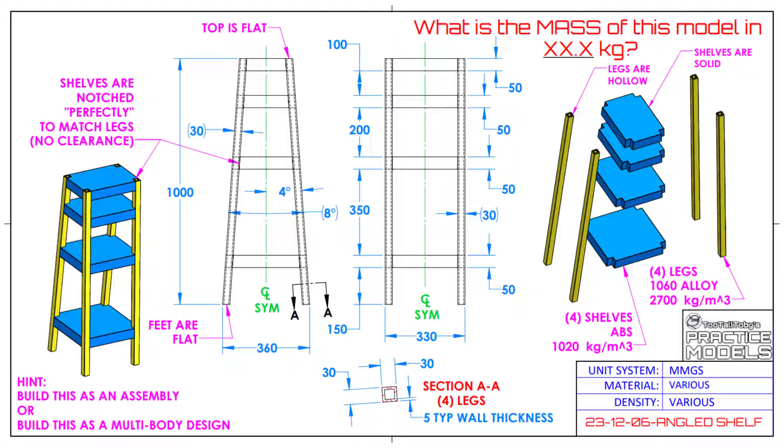So here we go. We're going to be doing this challenge now using SolidWorks, doing some live modeling. This is the challenge we're going to create, and unlike most of our live challenges, this one is an assembly. It's a shelf, 1 meter tall, with 4 shelves and a set of angled legs running up the side.

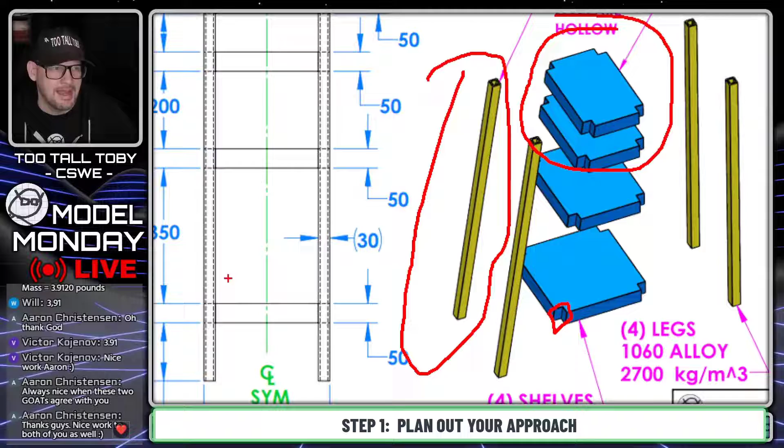What we always teach our students when doing 3D modeling is that before you get started, you want to come up with a game plan. Ask yourself how you're going to model each of the legs, how you're going to model the shelf, and how you're going to model the notch in the shelf so it perfectly matches up with those 4 legs.

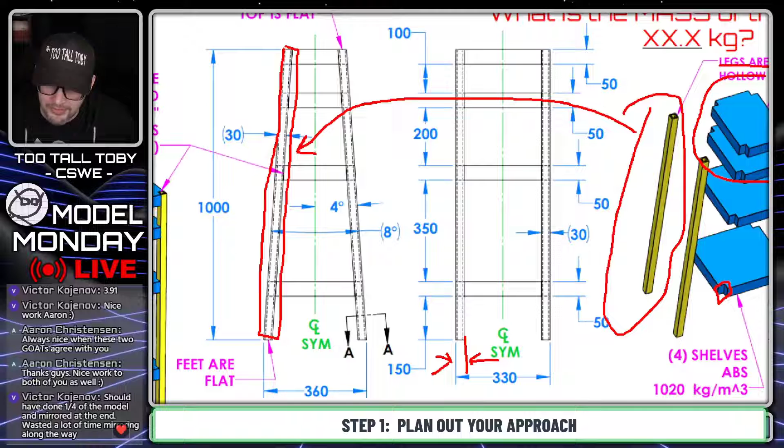I think for this model I'm going to use a single part file and do what's called multi-body design. This leg that I've circled, I'll create as my first body. I'll make a sketch on the front plane representing the shape of that leg, extrude it out to a depth of 30 millimeters, and use the offset sketch plane option to offset that sketch plane to 330 over 2, half of 330. That will give me my first leg.

Then I'll be able to do some mirroring with that leg. I'll mirror the leg over here, and mirror those 2 legs over here, and then I'll have all 4 of those legs.

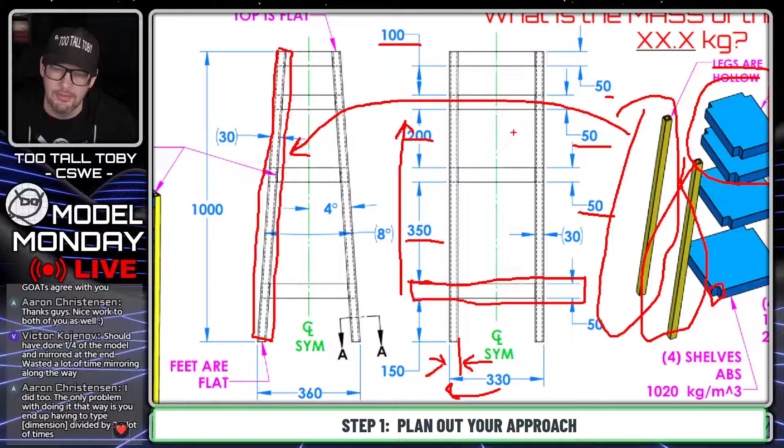Then I think what I'll do is create a sketch of the shelf by making a rectangle 50 millimeters high, and then do a really cool pattern called a linear pattern using the variable distance option. I'll say the first instance should be 350, the second instance 200, and the third instance 100. For each of them I'll need to add the 50 millimeter shelf thickness, and that should get me pretty close to the end of the model.

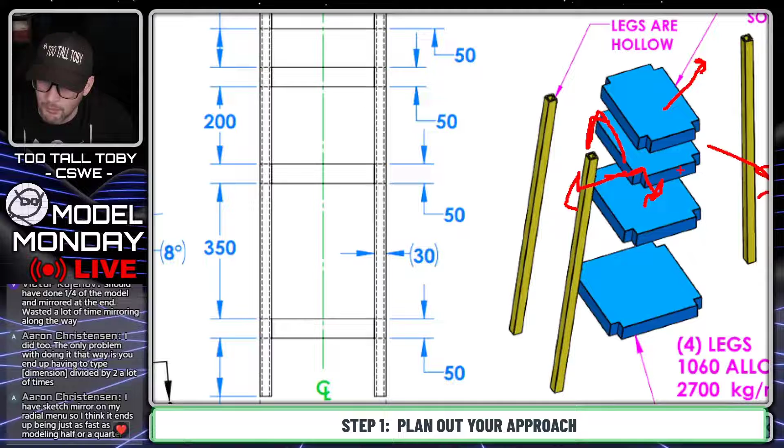Then I'll come up with the challenge of how to notch out these corners here. I think what I'll use for that is actually a little bit of surfacing to mix it up. I'll make a small surface on that leg, extend that surface, and then use it to do a cut through those shelves. Maybe I'll make a mirror of that surface too so I can get all 4 corners at once and make a cut of the shelf in the corner.

There are lots of different ways you can do this. I know in the chat Aaron was saying he did it using an indent command in the corners. You could maybe make it as an assembly. Lots of different ways to do this, but the main thing you want to take away is to always come up with a game plan before you get started with your model.

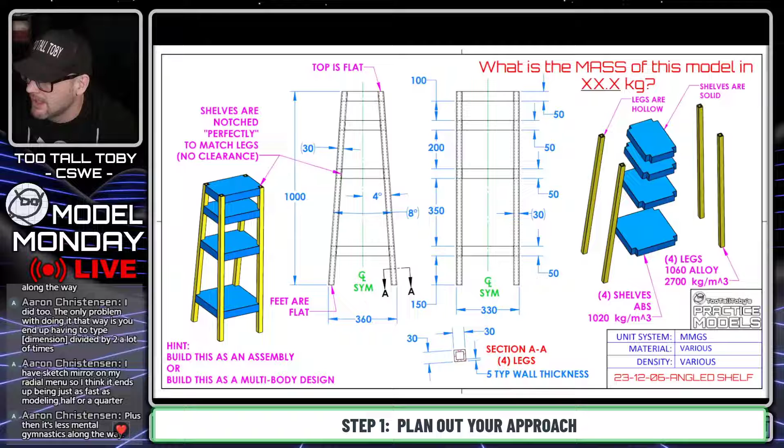So now that I've got that game plan, let's go into the Windows snipping tool. I'm going to grab a screen capture of this model and move it over onto my second monitor, and begin modeling this. As you guys know, when I start modeling I get really zoned in, so I'm probably not going to react to the chat too much.

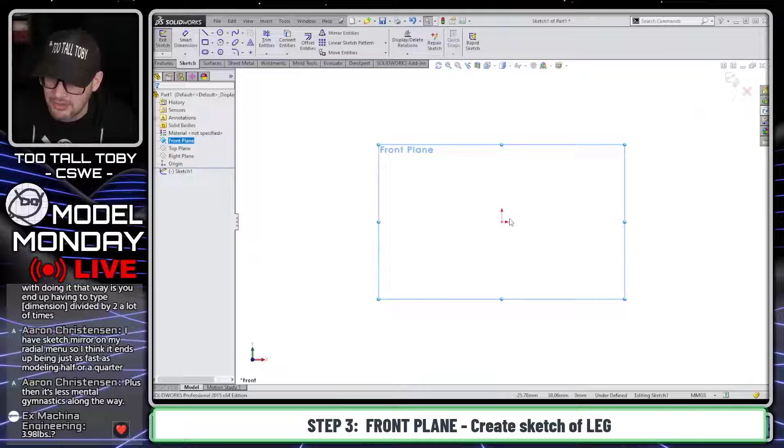I'll say that center line is going to be used to drive the location of this set of angled lines. Now, one thing you can do when sketching in SolidWorks, if for some reason you don't pick up on the parallel relationship, you can see the relationship showing up as parallel, in yellow, meaning it will add the relationship of parallel there.

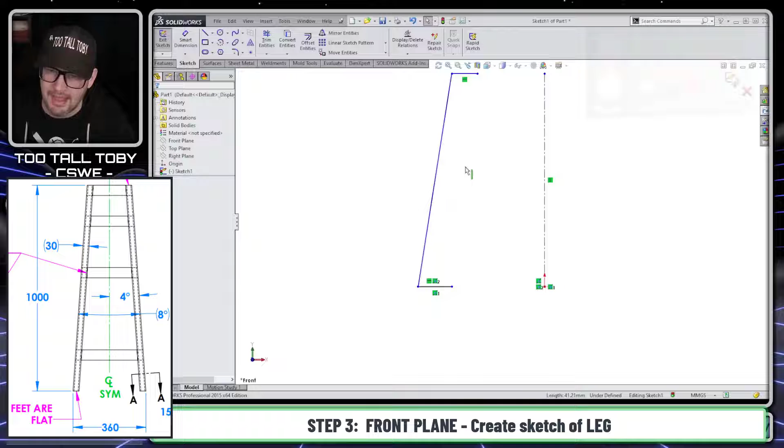I'm going to delete that line, and recreate a line here. So here's the line. And if for some reason you ever don't get that relationship to show up, you can just hold your mouse over that other line for a moment, then move back over, and that'll reactivate the relationship to that line. So if you ever find yourself in that spot, that's a pro tip you can use to make sure you reactivate that automatic relationship capability.

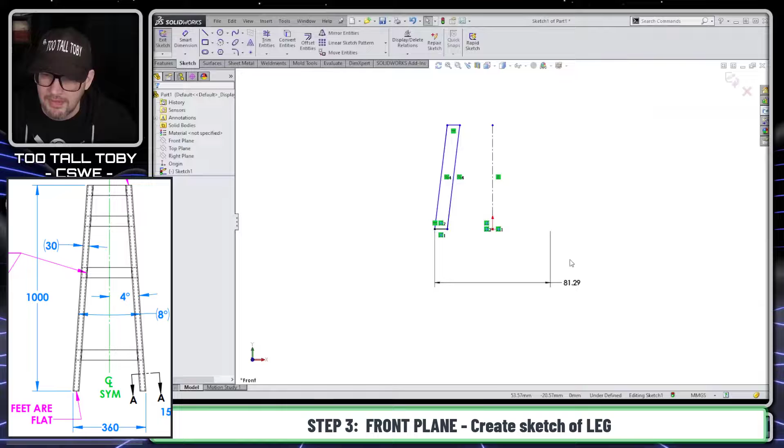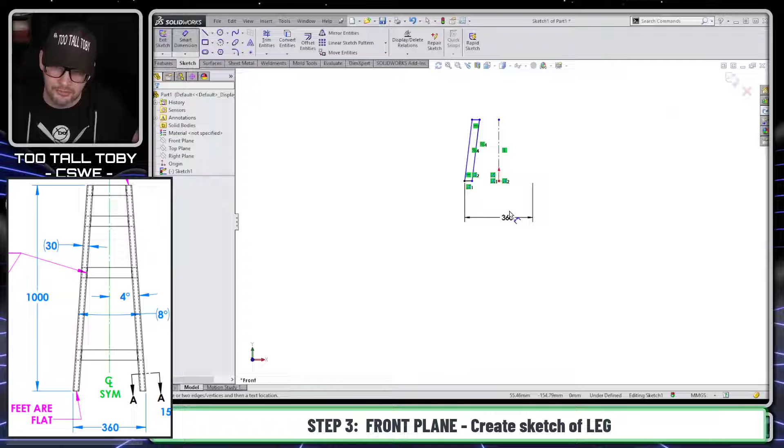Now this is going to have a distance to the outside of 360. The way I'm doing that is using what's called a doubled dimension in SolidWorks. I pick this point, pick this line, come across, and make that 360. Then SolidWorks does what's called auto scaling. A moment ago, before I did that, the dimension was 81, and it almost looks like the screen doesn't change at all when I change that to 360. But that's because when you put in your very first dimension, SolidWorks automatically upscales the entire sketch to match the value of that first dimension. So auto scaling on that first dimension - very cool functionality in SolidWorks 2015.

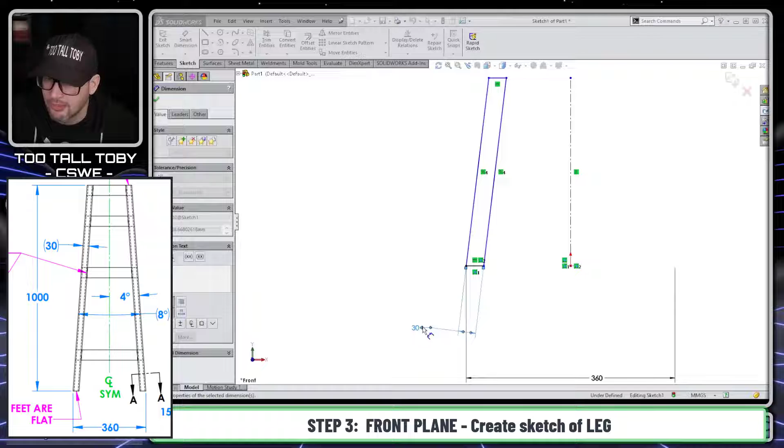Now what I'm going to do after this is create another dimension here, which represents the width of this thing - it's on an angle here. That width is going to be 30 millimeters. Then there's a dimension here representing the height of this thing, so the height is going to be 1 meter. Finally, I'm going to indicate an angle dimension here, from this line crossing over that line, supposed to be 8 degrees.

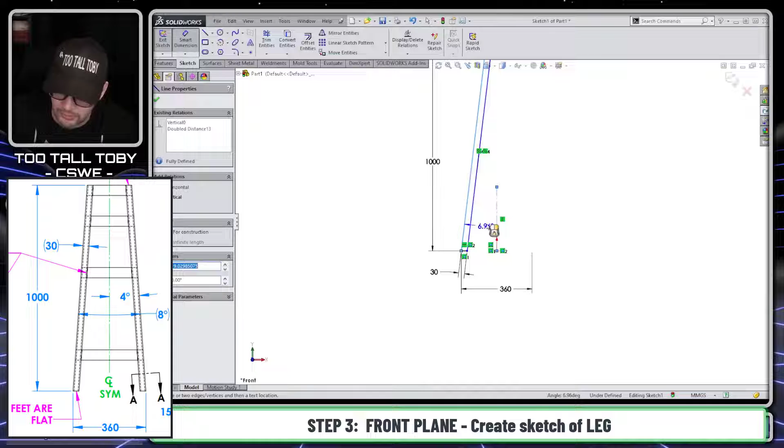So the way we get those double dimensions when doing an angle is you hold shift. When it's a linear dimension, it happens automatically, but when it's an angle dimension, you have to hold shift. So we're going to hold shift there and make that a dimension of 8 degrees. And there we go - that sketch is all black, meaning it's fully defined, fully constrained.

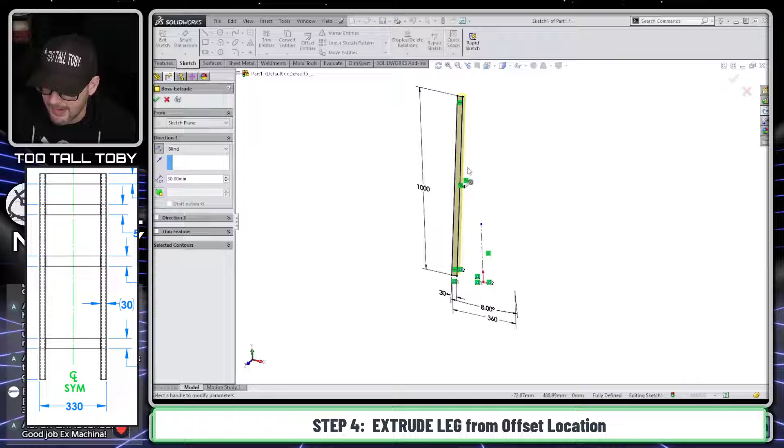Now we're ready to go into an extrude command. This thing is going to have a depth of 30 millimeters, but it's not going to be 30 millimeters from the front plane - it's going to be 30 millimeters offset. So I'll use this flyout menu here to make this offset, and that offset distance is going to be 330 over 2.

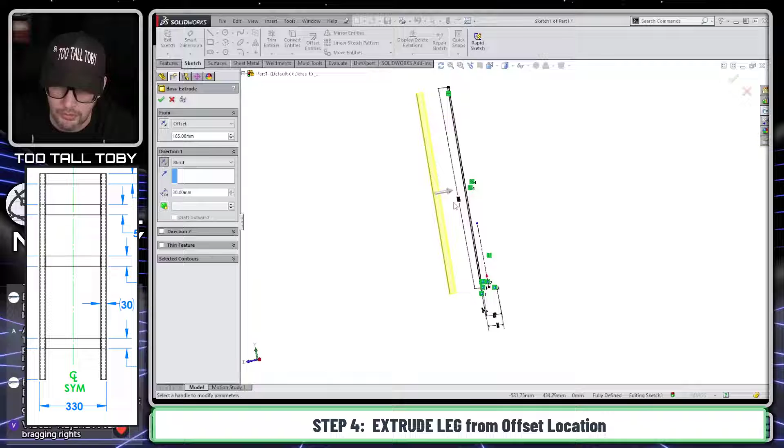330 over 2. And then we can examine the extrusion direction here, flip the direction if we need to, because it's going to be 330 over 2 and then going inward, or this way, inward - it's going to be going inward. So make sure the direction of that extrusion is correct. And there we go, now we've got that leg extruded in the correct direction.

Now this leg is supposed to be hollow, so I think the next thing I'll do is drive a shell here that's going to have a 5 millimeter wall thickness, and that shell is going to be applied on this leg and on this leg here. So we hit the green check mark, and there we go.

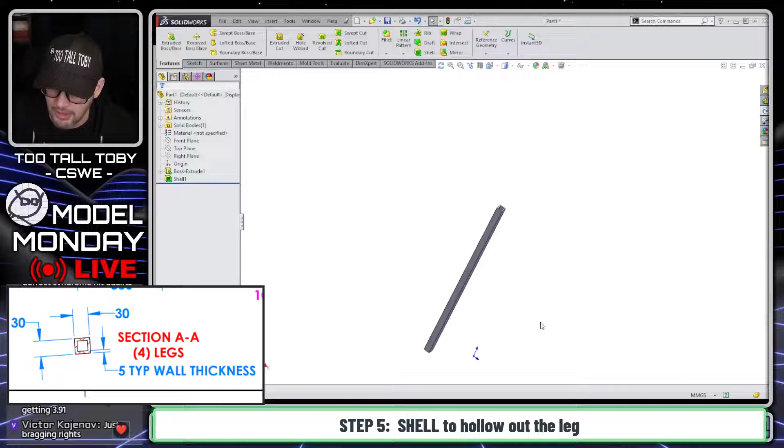That gives us our first feature there in the tree, that leg. Now I'm just going to show the front and the right plane here so you can see what our plan is.

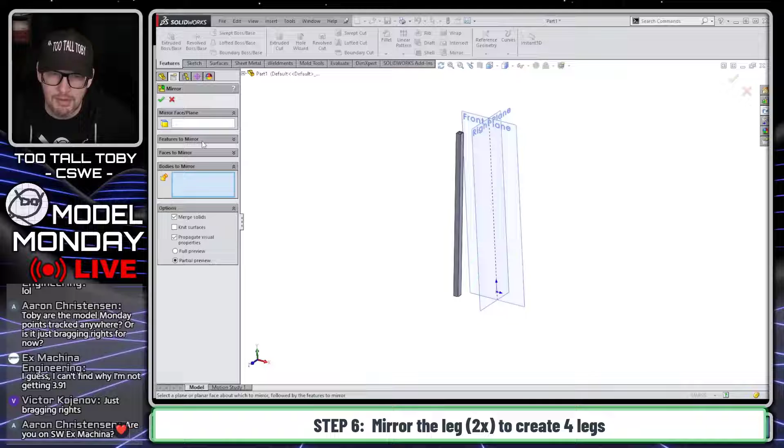Our plan next is to mirror that leg about both of these planes. We're not going to do this as a mirror feature where you go in and choose a feature to mirror. We're going to go down here to bodies to mirror. Right now the selection box is on features to mirror.

Here's a pretty cool thing that I learned. Believe it or not, I learned this from Aaron C in the chat, just through osmosis, through a different conversation we were having about a custom macro he was working on.

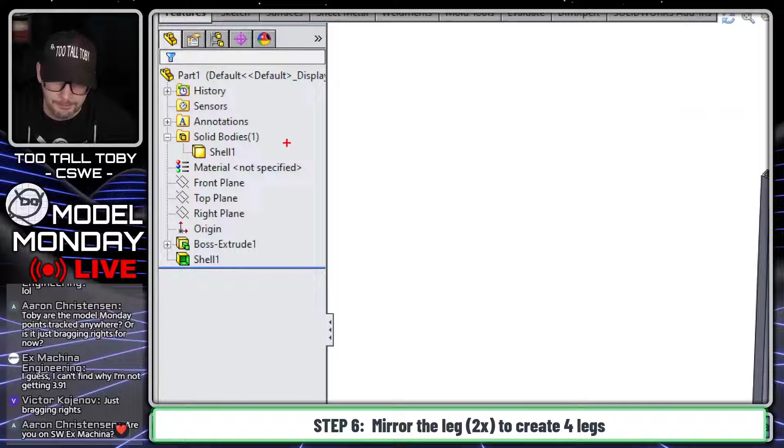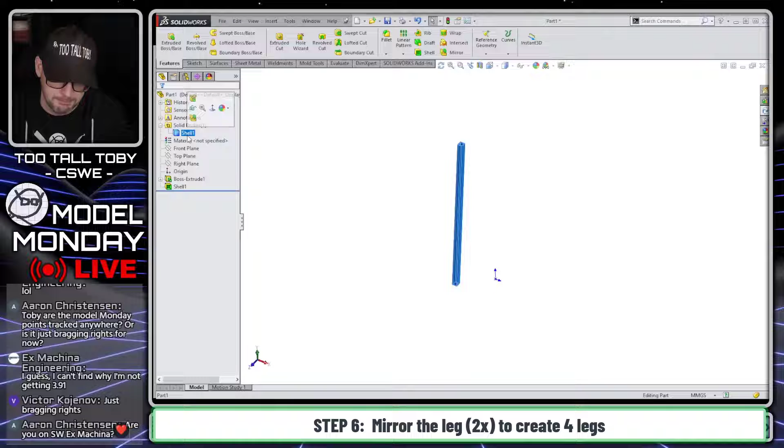Check this out. If you go into the solid bodies folder in SolidWorks and pre-select a body, then pre-select a plane, when you go to the mirror command, SolidWorks will automatically use the bodies to mirror field. Normally you can choose features, faces, or bodies to mirror. But if you pick this body, hold control, pick a plane, let go of control, and then choose mirror, SolidWorks automatically does bodies to mirror.

If you take that one step further and use the power move I posted a couple weeks ago, where you modify the context menu so that mirror is right here, then you can pick the body, hold control, pick the plane, let go of control, mirror, and just hit the green check mark, and you'll have your mirrored body.

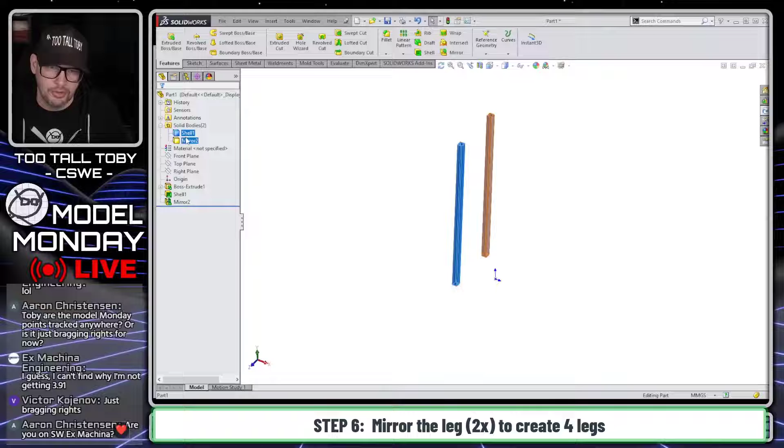So we can do it again here. We hold control, pick these two bodies, pick the right plane, let go of control, mirror, and hit the green check mark, and boom, we're done with those mirrors. It's all really out of the box functionality.

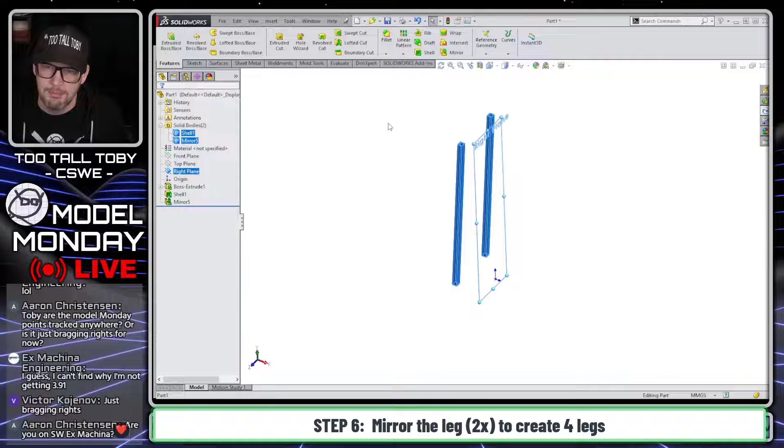The only thing I really did to customize it was modify this toolbar. But even without it, you could just click mirror and right mouse button to finish. It keeps going to merge solids on the first one because it's not multi-body yet, but once it's multi-body it'll happen automatically. So we pick these two, pick mirror, come out here and right click. Boom, we're done mirroring those bodies.

So that's something new I discovered and have been using a lot lately: pre-selecting a body from the tree and then choosing mirror. That automates the process of selecting the bodies to mirror. A nice little extra pro move in this example.

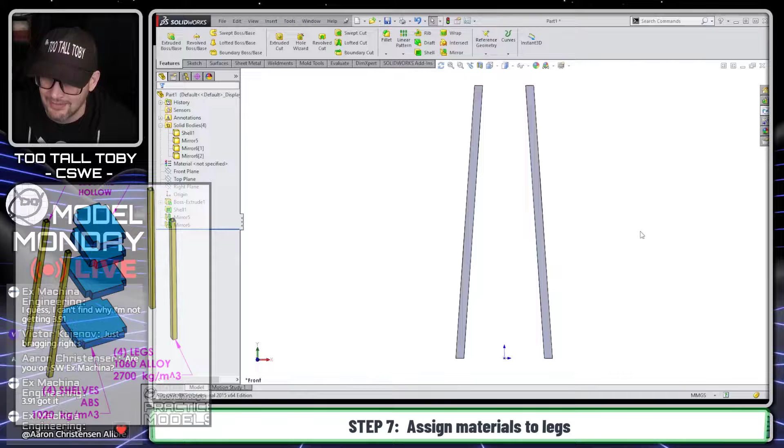All right, all of these legs are made from the same material, 1060 alloy. So I'm just going to make the whole part out of 1060 alloy. Here we go, 1060 alloy for that whole part. Then I'll make the shelves out of a different material.

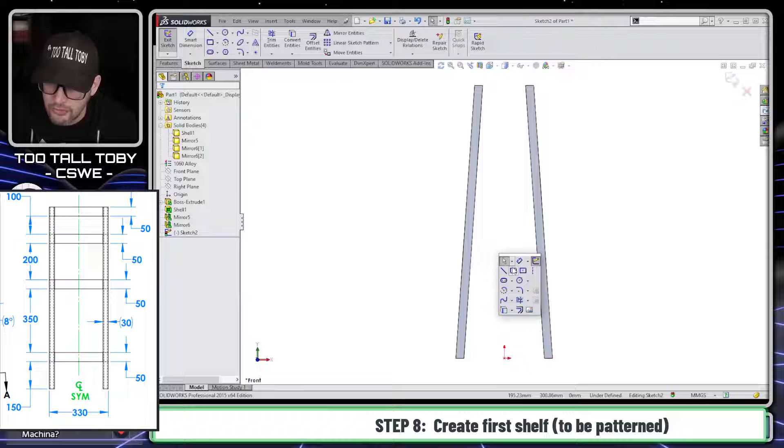Now for the shelves, I'm going to go to the front plane, begin a sketch, orient my view. The way I originally did this was I created the shelves individually using rectangles, like this. I made this 50, enter, let's say 300, something enough that it'll stick off the ends here. Let's make it 500.

Then I included a vertical point here, so I could take this point and make it vertical. Then I took that geometry, window-selected, held control, drag and drop, repeat, drag and drop, repeat, drag and drop, making all these points vertical, and then added the dimensions between them. The nice thing about that is it makes it easy to align the top shelf to this top segment.

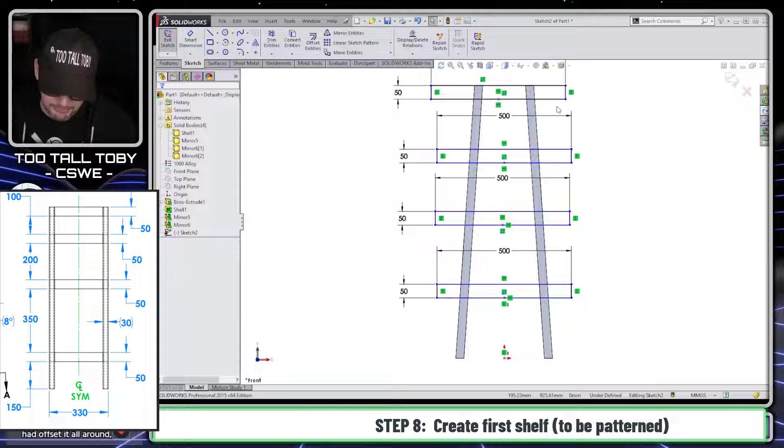But I'm going to show you today a different way of doing this. That's totally valid, you could do it that way and then use the remaining steps I'm about to show you. But a different way is you could create the dimension for the first shelf here from the bottom.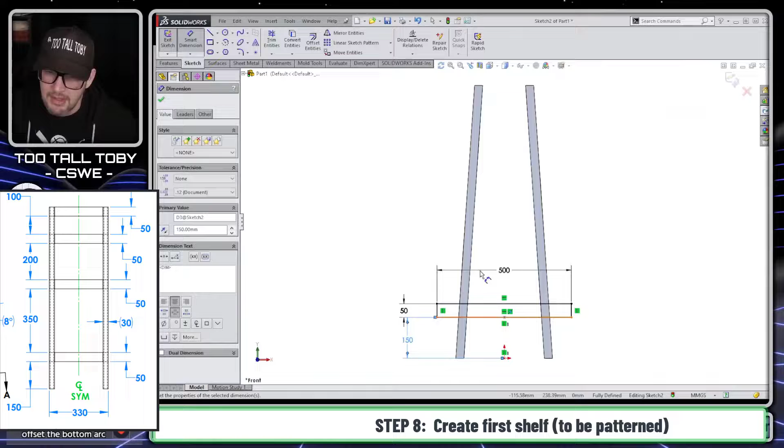So this is going to have a dimension here of 150. We'll go from the origin there to that first shelf, and we'll make that 150. And then we can take that geometry and extrude it. We're going to extrude that, and let's make it up to face for both direction one and direction two. I'll double click this face here, so there it goes, up to face.

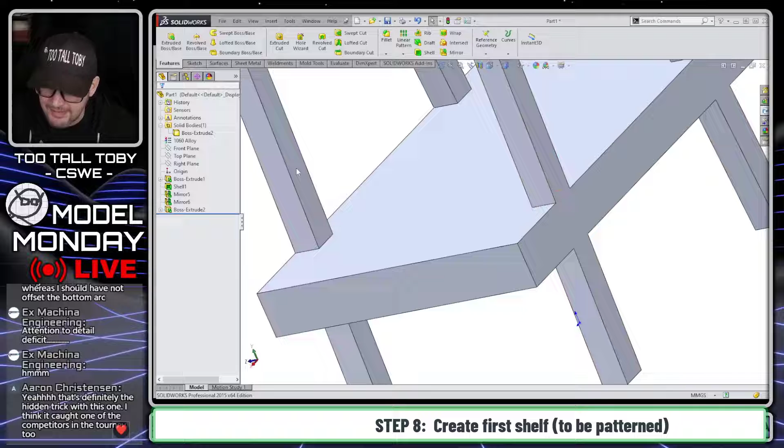And currently that is merged. That's not what we want. So I'm going to edit this feature here and say don't merge the results.

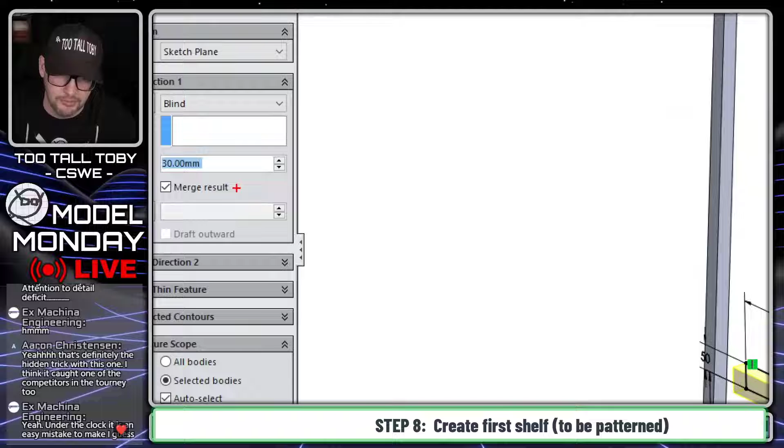Here's another kind of cool trick you can do if you're ever working in SolidWorks with multi-body. You can see here that when I'm in the sketch and I go to extrude it out, the default behavior is that merge results is selected. When you're doing multi-body or even a single body, it always defaults to merge result.

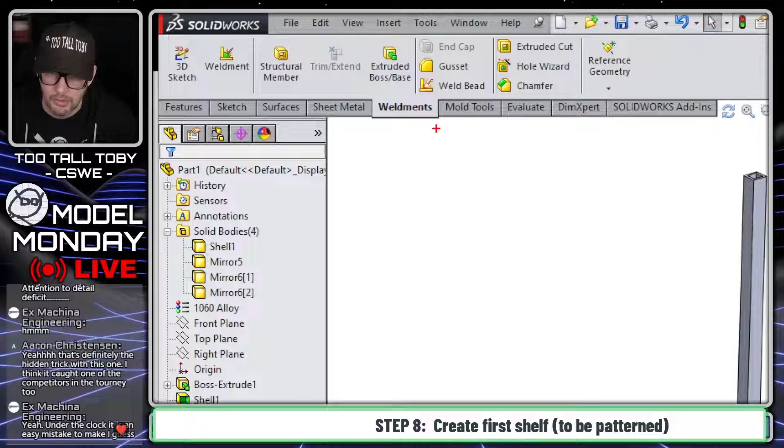Well, the quick way to get that to not be selected is you can go up here into weldments and click this button that says weldment. Let me get out of the sketch. Now I'm going to go up here and click this button that says weldment. I'm on the weldments toolbar here. And that's it, I'm just going to click the button. It adds a new feature in the tree.

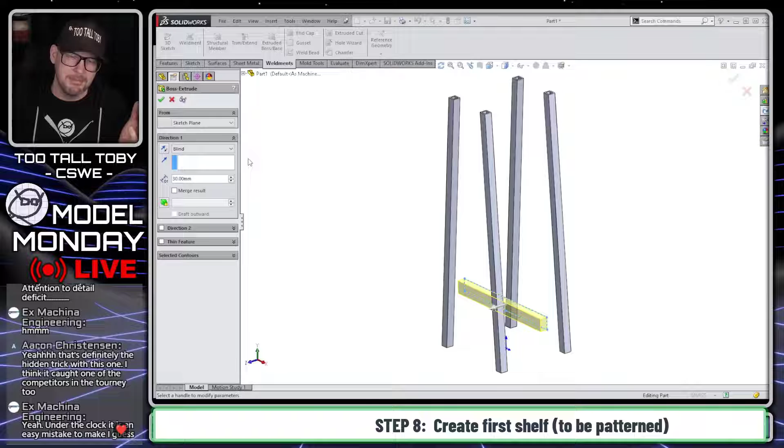It changes this to be a cut list, which means it'll group together items that are identical. But what it also does is now when I go to this sketch and extrude it, merge result is not selected by default. So if you know you're working in a model that's multi-body, it doesn't have to be a weldment. It could be a plastic enclosure for a remote control with a bunch of buttons, designed all in one part using multi-body. If you just click the weldments command and add that weldment feature at the top of the tree, merge results will no longer be selected by default, and that can be a nice time saver.

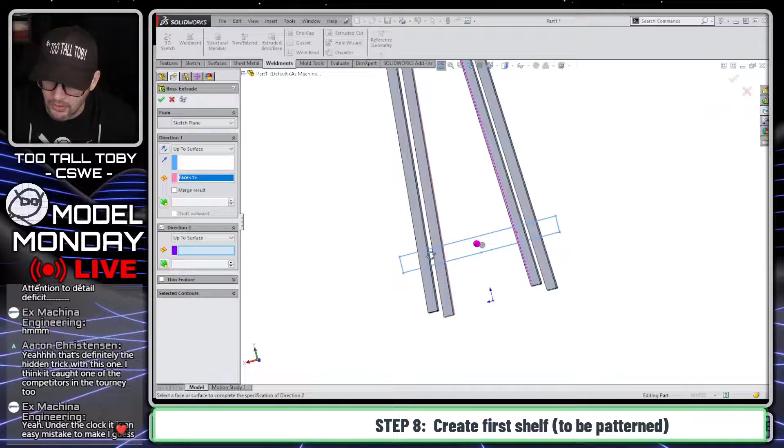So now we'll go extrude. We'll double click on this face here so that we go up to that face. For direction 2, we choose up to face, and we click on this face back here for direction 2. And there we go. We hit the check mark, and now that is not a merged result.

And this shelf is going to be made out of a different material, ABS. So I'm going to go to that shelf, right mouse button on the body, choose material, and change that to ABS.

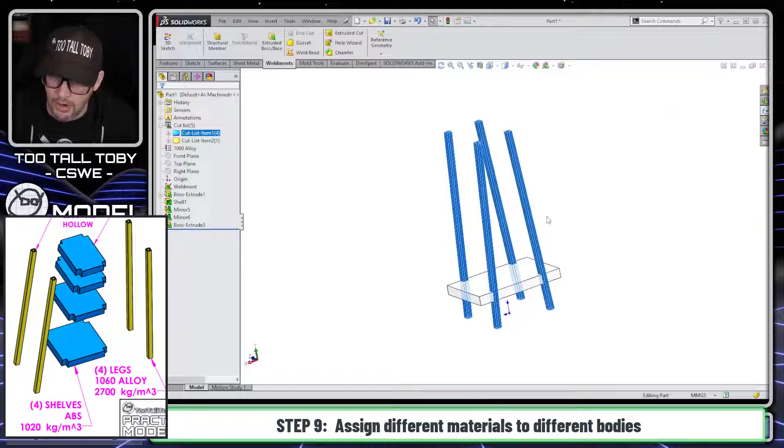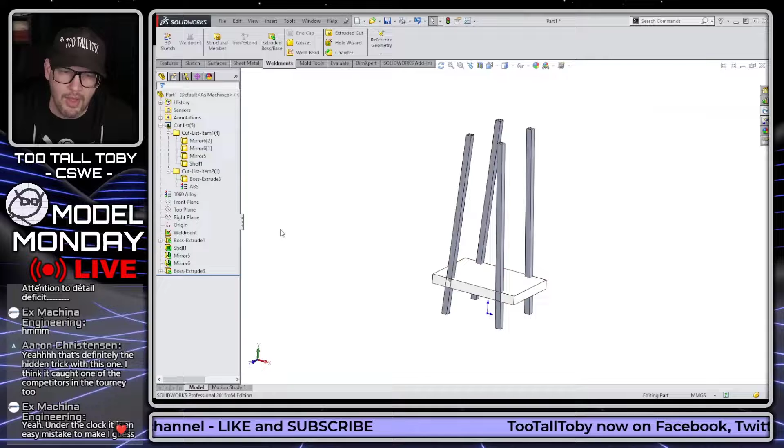So now the way these are listed is a little bit different. These 4 are identical bodies, all 4 of them are identical, so it's one item, one drawing, one SKU with a quantity of 4. And then this one has a different SKU, and this one also has its own material, so the material is listed down below. These bodies here are all using the material of the part. This body here is using a different material, it's using this ABS.

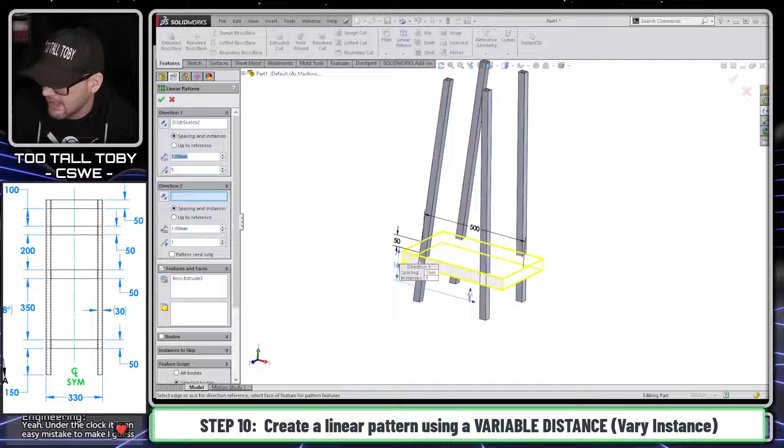So now I'm going to take that body and choose to create a linear pattern from that feature. I go linear pattern here, and I'm going to say that the linear pattern will use this dimension to drive the direction of the pattern. This is just something kind of cool you can do with linear patterns, using a dimension to drive the direction. Then for the spacing, I'm going to say that spacing is going to be 350. There's the spacing of that pattern, and there's 4 instances of that pattern.

That looks okay, certainly the first one looks good, but the remaining shelf is supposed to be 200, and the final shelf is supposed to be 100 for the spacing. So what I'm going to do is go down to the very bottom of the linear pattern command, where there's an option for instances to vary.

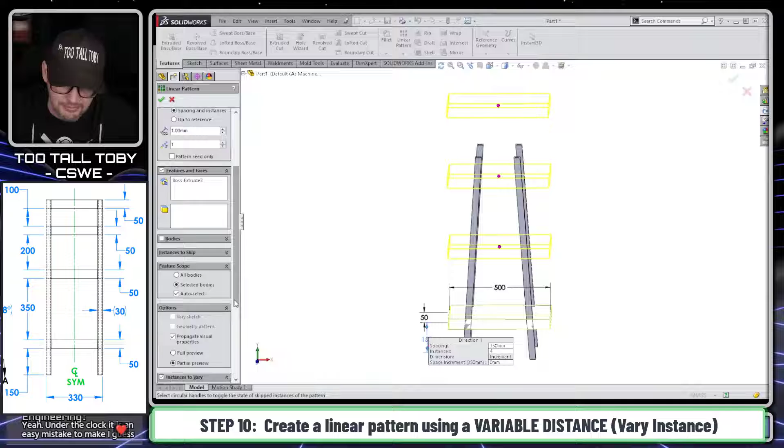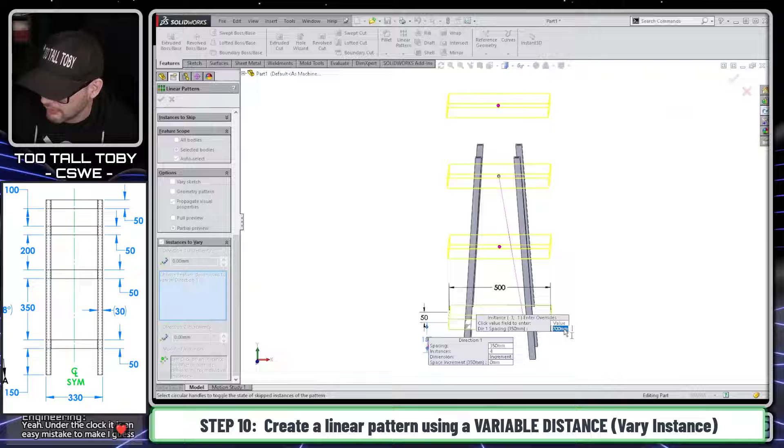And I can choose that option for instances to vary. And then what I can do here is for each of these instances, I can click on this little magenta dot and I can say modify instance. So this one is going to have a spacing of not 350, but really it tells you what the total calculation is. So it's like 350 plus 350 gets you to 700. So it's going to be 350 plus 200 to get me to that instance.

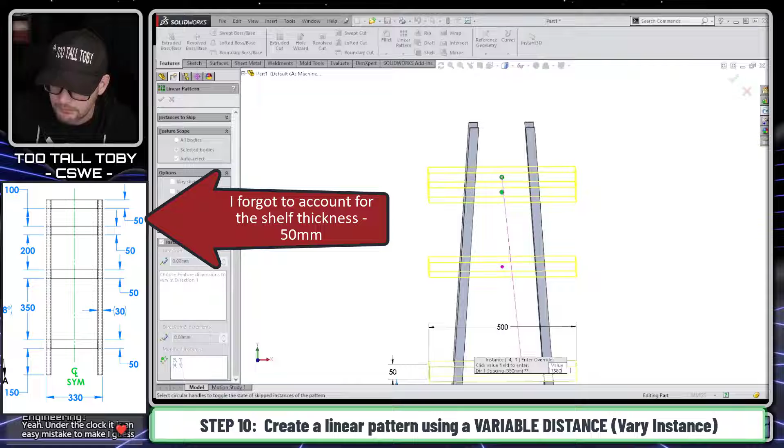And then I'm going to do the same thing here. I'll say modify instance, and this one is going to be 350 plus 200 plus 100. I think, yeah, you know what? I needed to add that extra 50 in there. So we'll modify this instance and make that plus 50, or 600. And then we'll modify this instance. And this one is going to be plus 100. So this is going to be 750. 750.

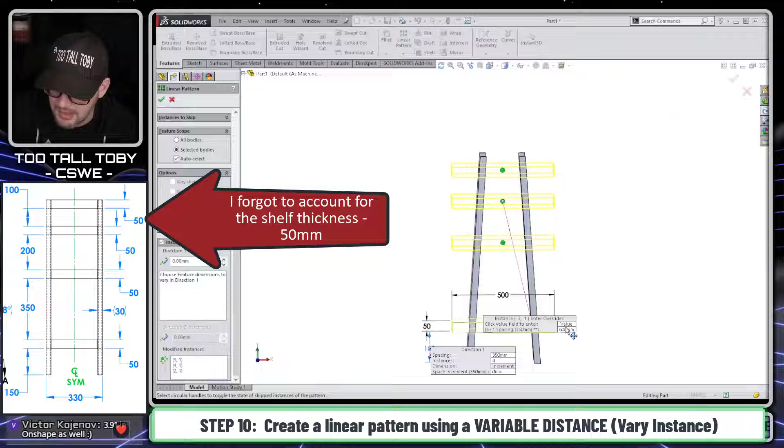Oh, I guess actually this first distance here was wrong also, right? Because it's 350 plus 50. So, all right, it's fine. So this is going to be plus 50 as well. So 350 plus 50, so 400. This one is going to be 650. And then this one is going to be, I'm just adding the 50 here, make that one 800. Whoops, 800. There we go. So that gives us the spacing using a different technique.

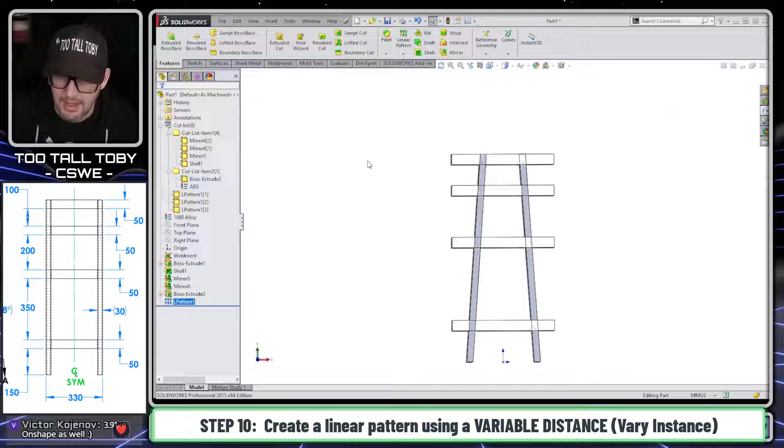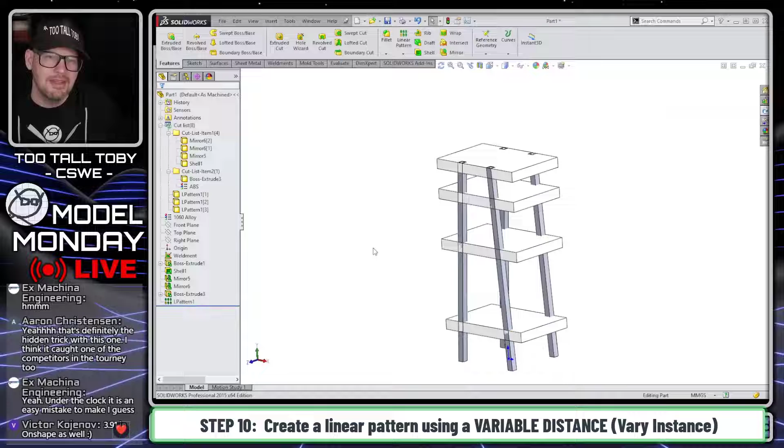When we do the linear pattern using the modified spacing option, we can get that same spacing. This seems to me like it's a little bit cumbersome. You saw as I was going through, I was doing some extra steps that I probably would not have done in the actual live model. I think I would have just used the technique I showed you initially, but this is meant to be kind of a tutorial, a live solve, and I wanted to just show you some other functionality.

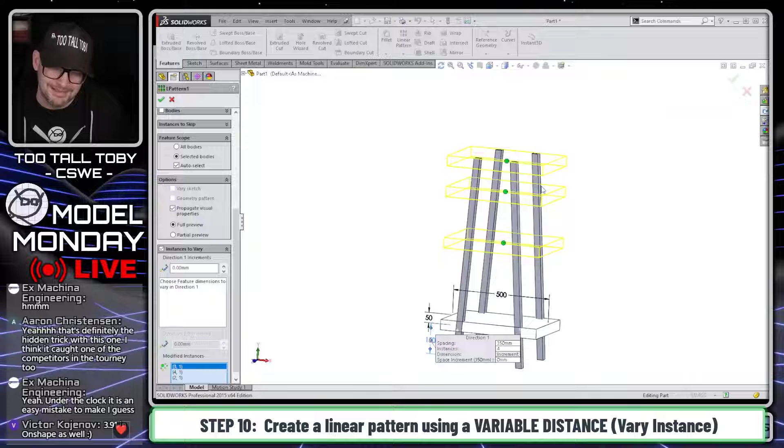To date, when we've talked about this option of modify instances, what we've really talked about is modifying the width of those shelves at the higher level, modifying a dimension from the sketch, but you can also modify these instances and change the spacing of the linear pattern in those modified instances. And that's really what I wanted to show off in today's demonstration.

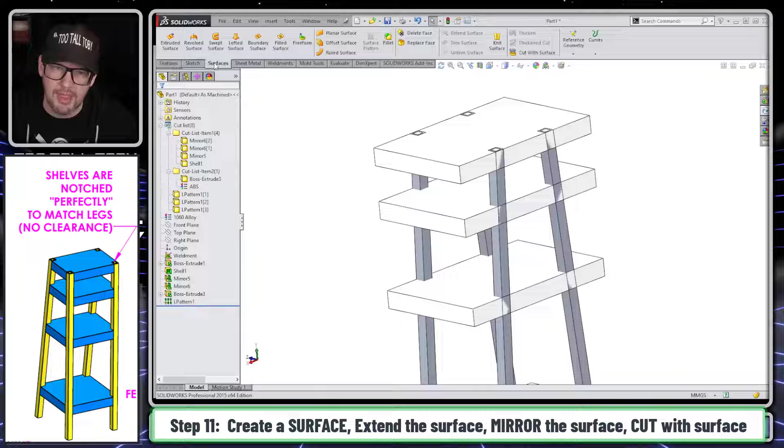So now we get to the final phase of this design. And for me, what I'm going to do here is use a surface command to create the geometry that I can use to cut these shelves. That surface command is something that I'm very comfortable using. If you're not using surfacing a lot, then this might be a little bit too exotic for you. But the way that I would do it is I would go surfaces and say offset surface, and I'm going to offset this surface at 0.

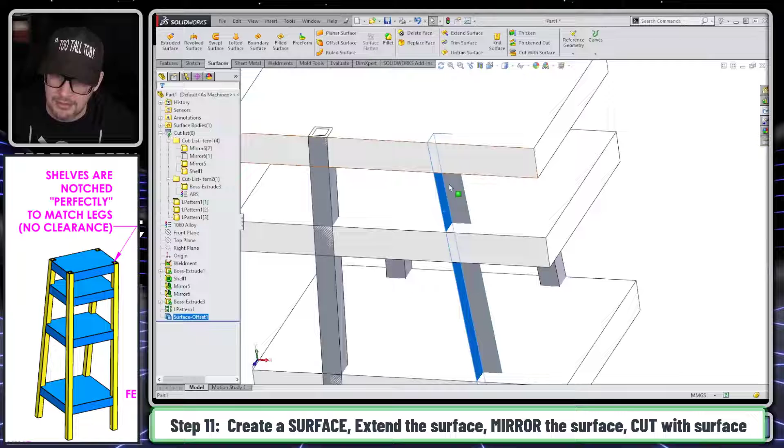And what I'm going to offset is this face here on the back of that leg and this face here on the inside of that leg. And once I offset those two faces, I can hit the green check mark here. I'm going to hide that body. What I'm left with here is a surface here and a surface here that I can use to cut. The problem is that this surface here isn't long enough to do that cut.

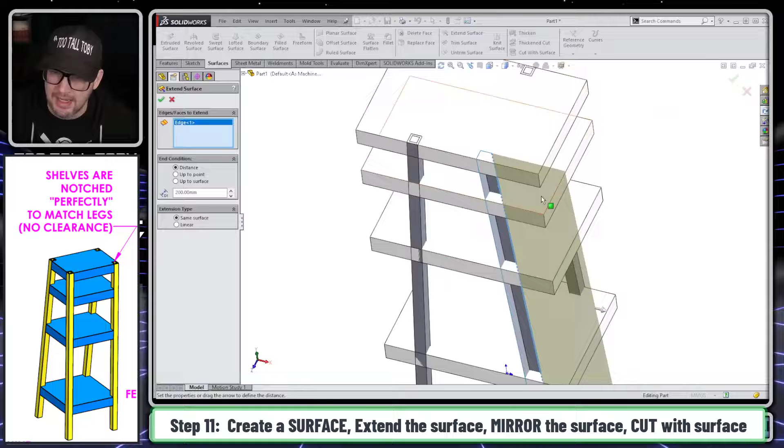So I need to do what's called a surface extend. So I would do an extend surface here and maybe bring this out, say 100, 150 millimeters, whatever I need to get that surface out far enough, maybe even 200 millimeters. And now that I've got that surface extended out, I've got enough room on that surface to cut these shelves.

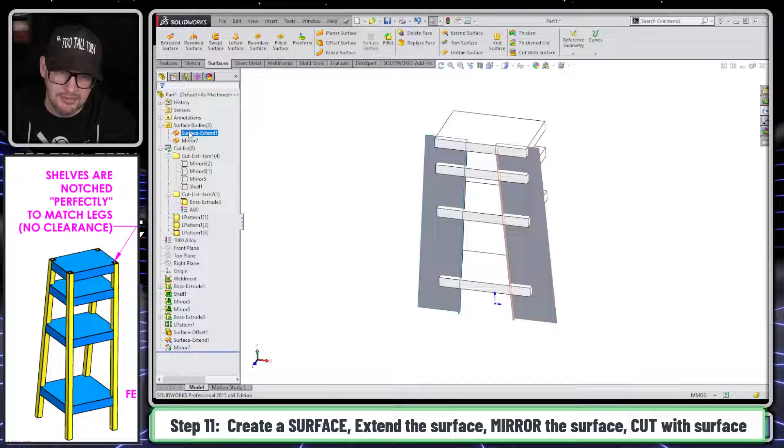So what I would do here is I would probably hide these remaining legs just to make it a little easier to see. I would use the trick that we talked about earlier: pick the body from the tree, hold control, pick the plane, let go of control, mirror, right mouse button to finish that, and then pick the two surface bodies, pick the front plane here, let go of control, mirror, and then right mouse button to finish that.

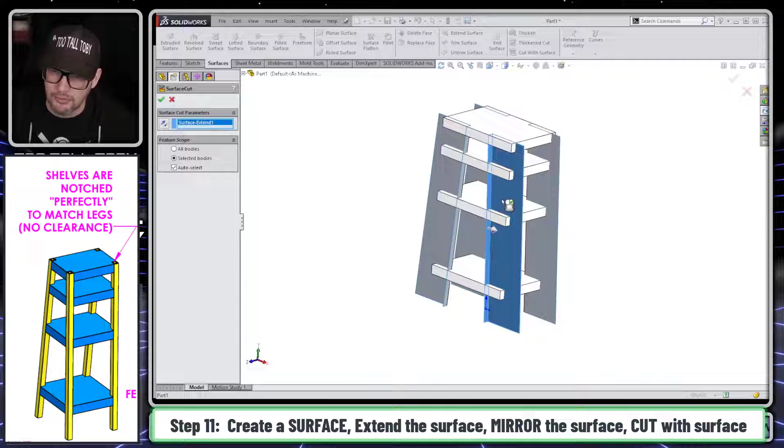And now I can jump into the command cut with surface. So insert, cut with surface, or here, cut with surface. Then you pick your surface that you're going to be cutting with, and then you pick the body or bodies that you're going to be cutting through. So I'm going to be cutting through these bodies here. And now I've removed that corner, and then I can just repeat.

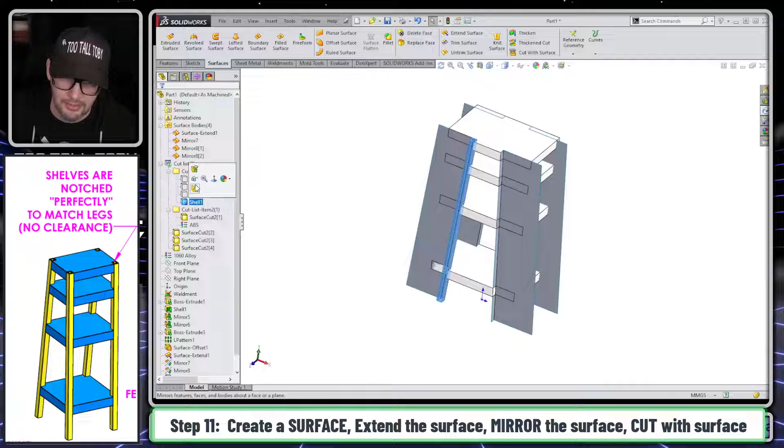So cut with surface. I'm going to pick this surface here. Usually if you do auto select, it's actually based on hide show visibility. So if I hit the green check mark here, it'll probably only cut these and not cut the leg that was there. So that leg is probably still there. Yep, I can see it's still there in the preview. So it's usually just based on hide show. If it's shown and it's interfering with that surface, then that body will be selected.

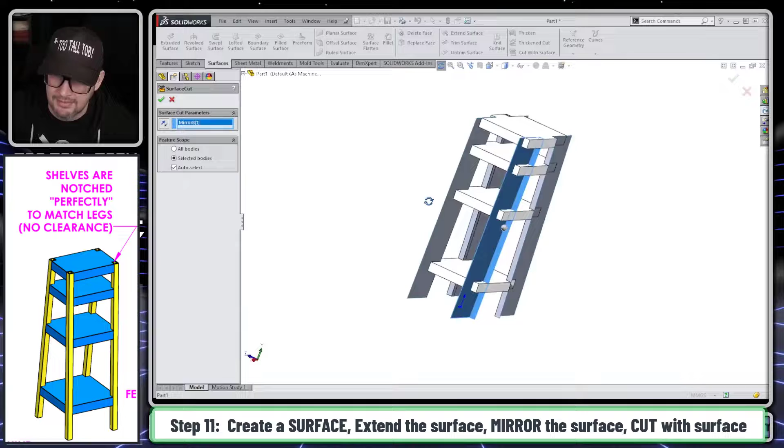So instead of needing to pick these 1, 2, 3, 4 bodies, what I could do is I could say cut with surface, and then I could say auto select. And since these 4 bodies here are shown, and since they're being intersected by that surface, they're just automatically selected.

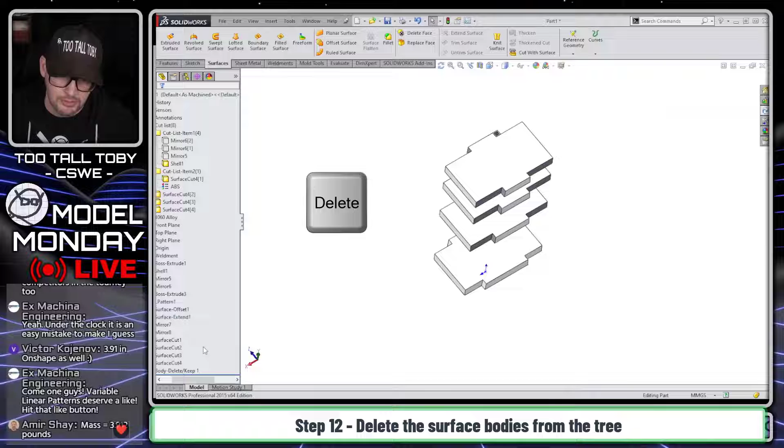Now, the final thing I'm going to do here is pick all these surface bodies and use the command insert features, delete/keep body. But the shortcut to that is if you pick a body from the body folder and you press delete, then those bodies are selected and a new feature is created down here at the bottom of the tree called body delete/keep. So now those bodies are gone.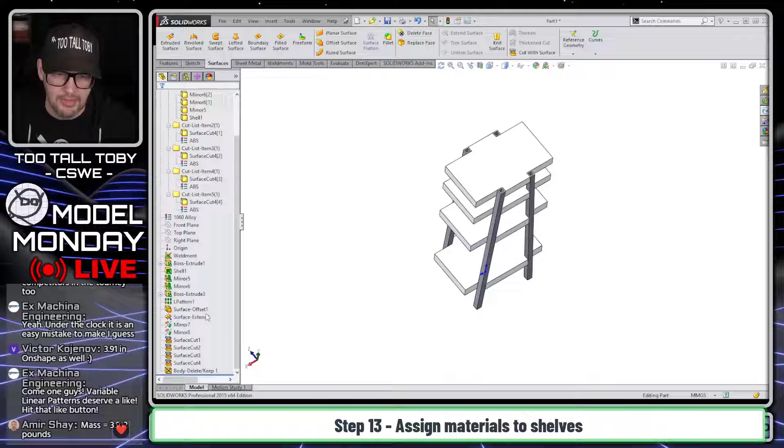Now I can bring back these bodies here. These guys here didn't get the custom material, so let's make sure that they all have ABS as well. So ABS, ABS, ABS. So all 4 of the shelves here have ABS, and the legs have that 1060. And now the final thing I need to do is just clean up the shelves there on the outside, because they're obviously sticking out too far. Although I kind of like that design more for the shelves. I think I would actually prefer something like this in my living room.

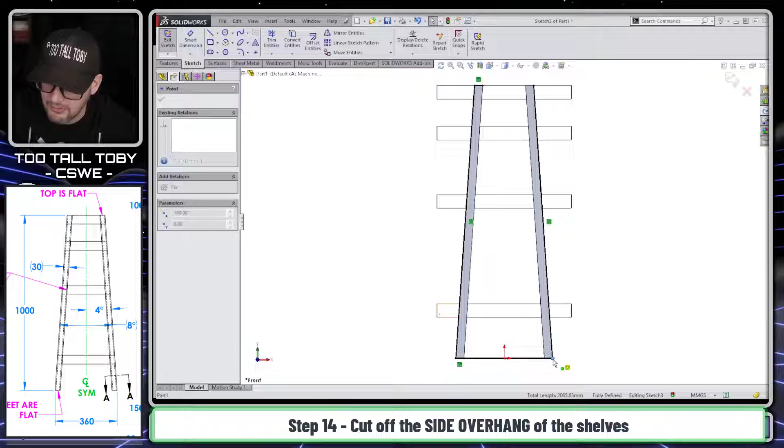But what we could do for that is we could just begin a sketch, convert entity. Really, we could convert up here too, but it's fine. Convert entity, and convert entity. So I just did a hold control and picked all 4 of them, bring these 2 lines together to close that thing off. And then we could do an extrude cut. So S key, extrude cut, right mouse button through all, and then we're going to do flip side to cut. So instead of cutting to the inside, it's going to cut to the outside.

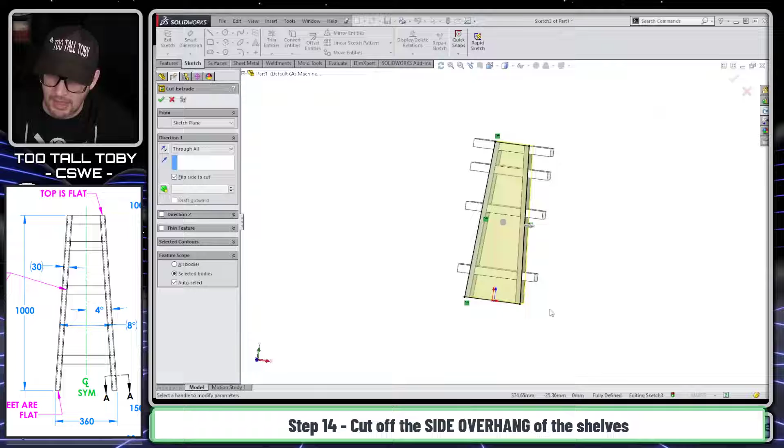And once again, our feature scope here says which bodies are going to be affected by this. Well, we can do auto select because the shelves are shown and only the shelves are going to be affected. The legs are not going to be affected by this cut extrude. So when we hit the green check mark, there we see that only the shelves were affected, the legs were not affected. And so now at this point, we can do a Control Q to rebuild.

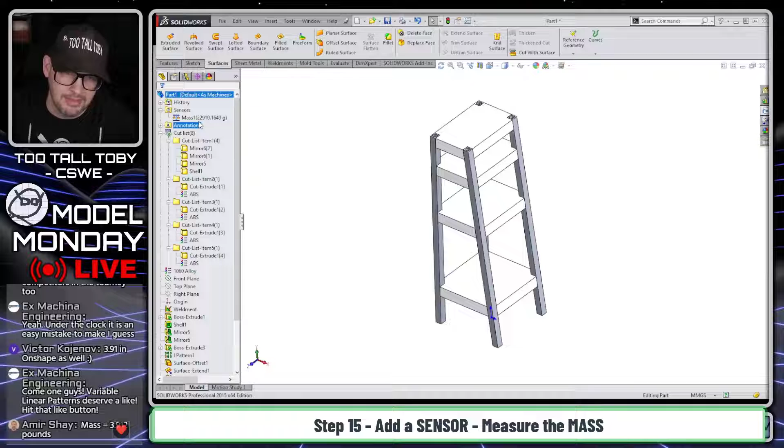And if we had our template set up with a sensor, we could just go up here and look at the sensor. But if not, we can add a new sensor, or we could go to mass properties. Either way, we can see that the mass of this thing is 22.91 kilograms. So let's see if that is correct. And that is correct, 22.9 kilograms. So we did it. We modeled this thing up using multi-body design in SolidWorks.

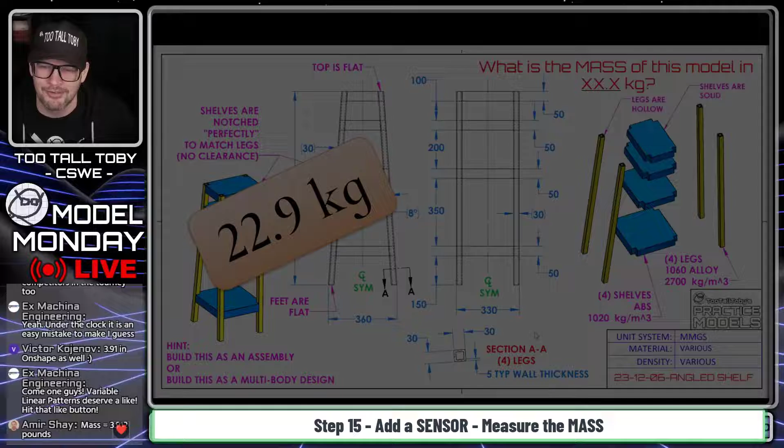There were a lot of good tips and tricks there on working with multi-body, and hopefully you can enjoy them in the future of your SolidWorks usage. And that is our live solve. Let's move on now in this presentation.

Just gonna take a look here at the chat, see if anything came up, some discussion here of